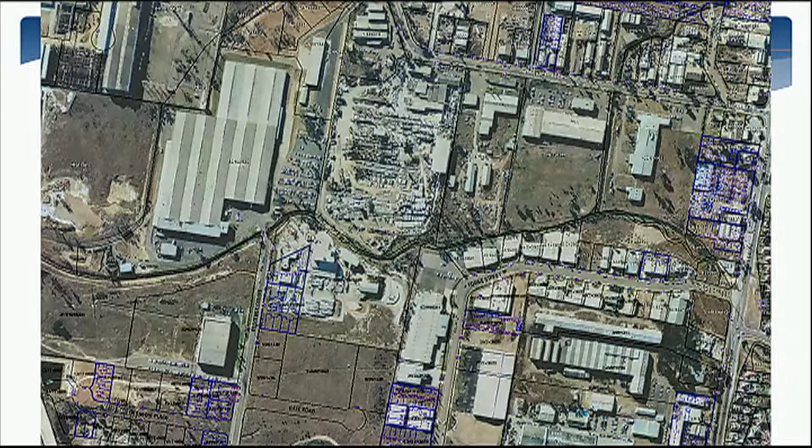So this is an aerial photo of Breakfast Creek in the 1970s. You can see it's already incised, practically no riparian vegetation, probably got a directly connected impervious area of about 20%. And really this is the beginning of the end of this creek. You look at that creek system today, 90% directly connected impervious area. It's got more riparian vegetation than it did have. The right-hand side you can see has been cleared and it's currently undergoing rehabilitation. So rehabilitation involves creating a low-flow channel, armouring that with some pretty substantial sandstone, getting rid of the weeds and planting native veg.

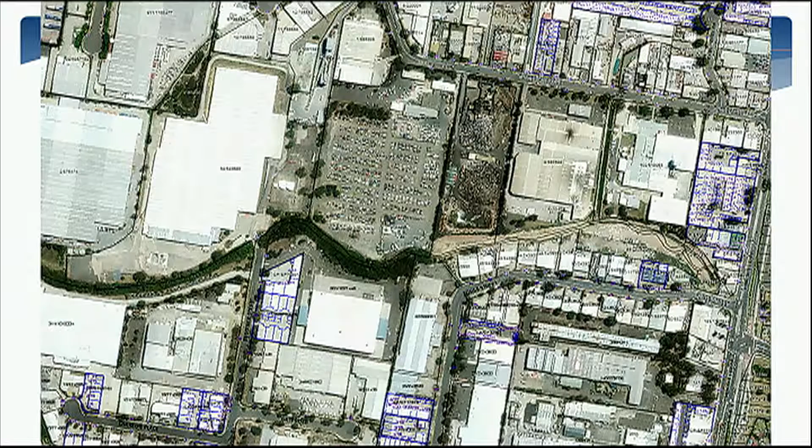At Blacktown, we protect water quality through development control plans, and the plan was called Part J. It required best practice management of all developments in infill areas. So we talk about 85% removal of TSS, 65% removal of phosphorus, 45% removal of nitrogen. So they're the water quality targets. It also required compliance with waterway stability, on-site detention, and water conservation to be addressed, where it wasn't being addressed through the New South Wales state government policy. It's quite a good example of an integrated water cycle policy.

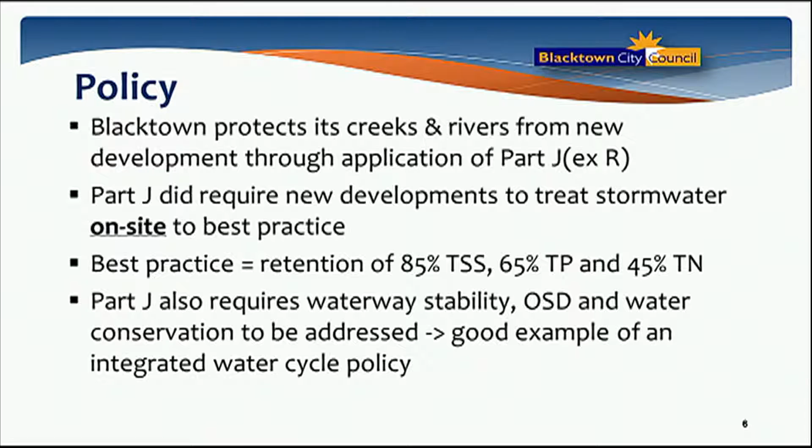So water quality is about protecting the biological and chemical quality, and to some extent the physical quality of creeks. Waterway stability is about making sure those creeks aren't eroded every time it rains. We do that through something called the Stream Erosion Index. However, the Stream Erosion Index is really a geomorphic tool, and it's not an eco-hydrological tool, and I think it misses the mark in that respect.

And in this context, we're talking about creating millions of additional square metres of paved areas. And for each million square metres of paved area we create, we add another 0.5 gigalitre of water down the creeks. That's on top of the existing flow that goes down there already. Costs a lot of money to armour all of our creeks. Obviously, it has major ecological implications.

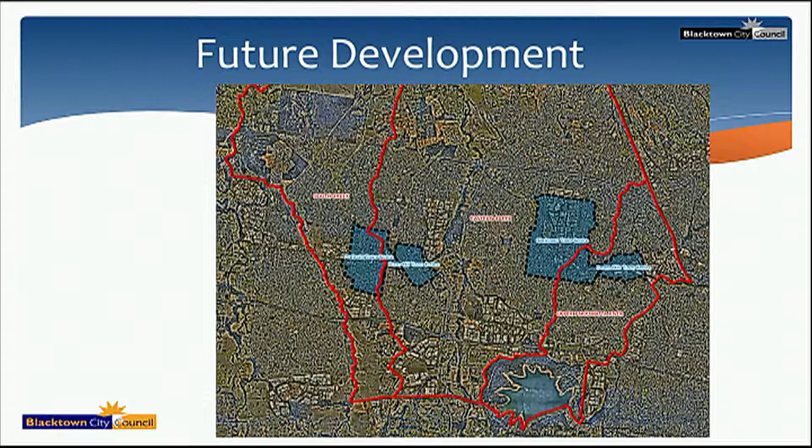So future development within the infill areas of Blacktown has been identified to occur in four urban renewal precincts. You can see on that slide. I guess it's a good thing to limit that urban renewal to those areas; that confines the impacts on the receiving waters to those receiving waters immediately downstream of those areas. We need to accommodate another 55,000 people within those precincts. So we've done some modelling of that. We're going to add another 2 million square metres of impervious area, leading to another 1.14 gigalitres of water going down those creeks every year.

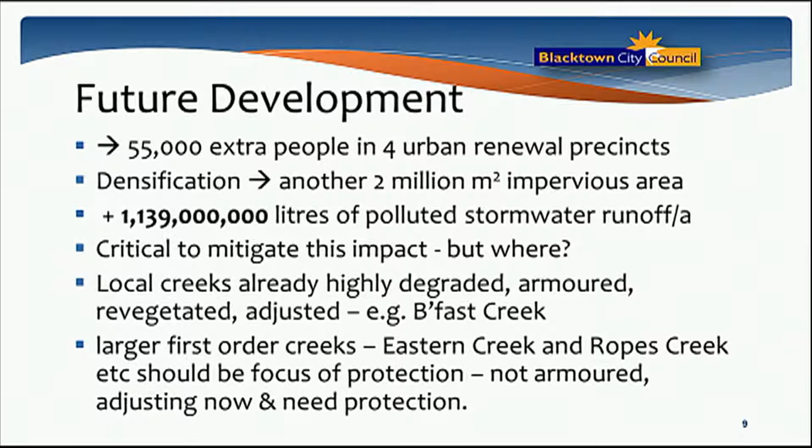Look, there's no question it's critical to mitigate that impact, but the question is, where is it critical to mitigate those impacts? And I pose that question in the context of Breakfast Creek, which is the main creek that runs through those built areas. I've mentioned they're already highly degraded, but we've got the large first order creeks, Ropes Creek, Eastern Creek, etc., which really should be the focus of our attention. They're not armoured. There's no way we could armour them. They're massive. It would be a $1 billion project to try and armour them. It would also be a massive ecological loss.

So on top of the GIS modelling, we then took that data and we dropped it into a MUSIC model to try and estimate the extra loads. And a little bit politically incorrect, but I think you can see this urban development will generate enough nutrients to keep a jihadi bomber in business for quite a long time.

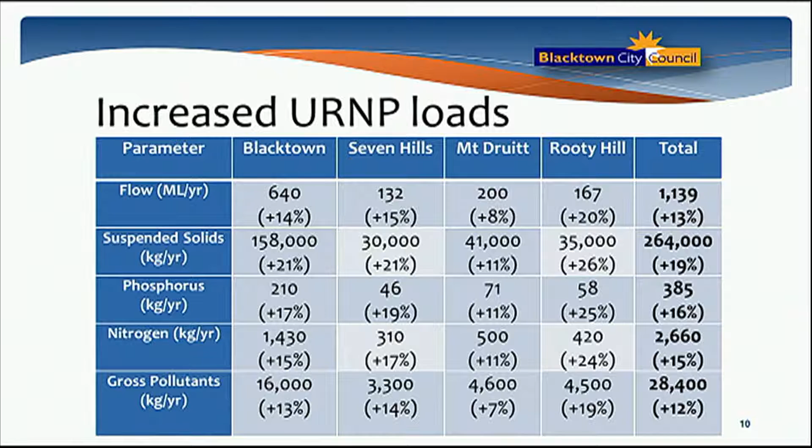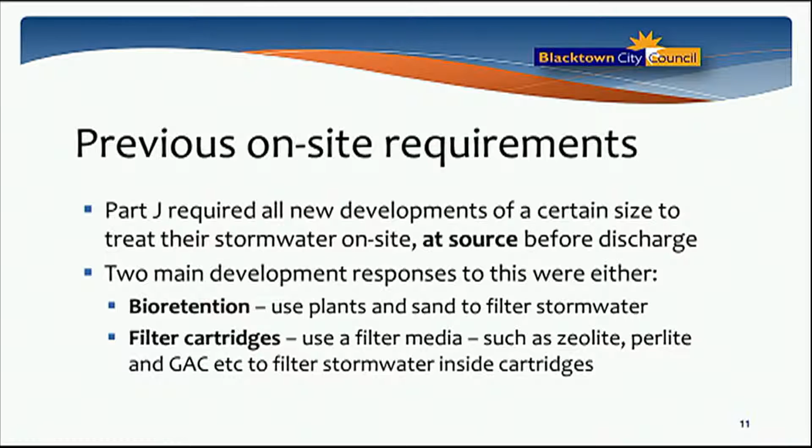And just to pick up from Andrew's, the previous speaker's indication that future development in SA is largely going to be smaller mum and dad developers. That's exactly what we've got at Blacktown. It's opportunistic. It's not done by Mirvac or Lend-Lease. It's very much shoehorned into the development. There's no way that we can capacity build all of these small developers. So, we really wanted an integrated response, but it's very clearly not integrated.

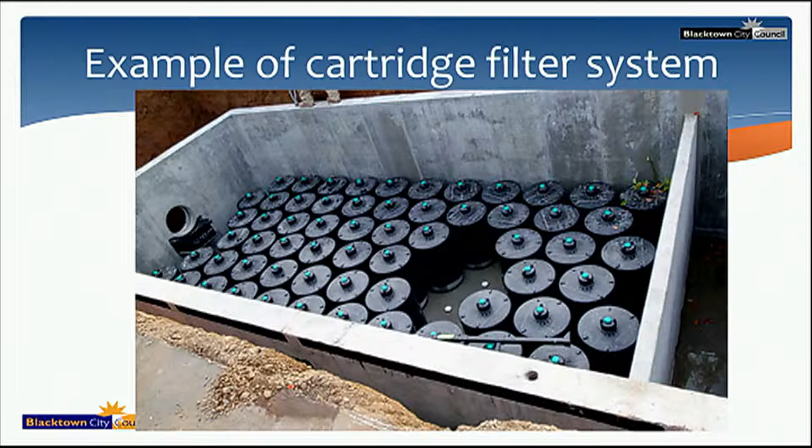That's an example of a cartridge filter system. I don't know if you guys are familiar with them. Water flows into the chamber, fills up the chamber, enters the cartridges. It's polished by perlite, zeolite, other filter media, and it flows out cleaner.

So council received a lot of complaints with respect to the on-site requirements. We had an overzealous DA assessor who was making everybody's life quite difficult. It was taking a lot of time to assess it. It was very costly. We've seen that the responses were shoehorned. But really the biggest risk is that once these systems were built, nobody was actually going to maintain them. And the evidence shows very clearly that people weren't spending money on maintaining them. So council resolved to comprehensively review its development control plan.

That's another example of a bioretention system, built in very limited open space on a townhouse development. So it actually sterilises that space. It's also quite weedy. So we engaged a panel of experts, including Tony Wong and some public policy experts and urban development industry representatives. They all endorsed council's policy.

But then also council staff recognised that there was a potential opportunity to do something off-site, and so we started looking at developing a precinct scale approach. We commissioned quite a detailed feasibility study, probably more detailed than most strategic planning I've done in the past.

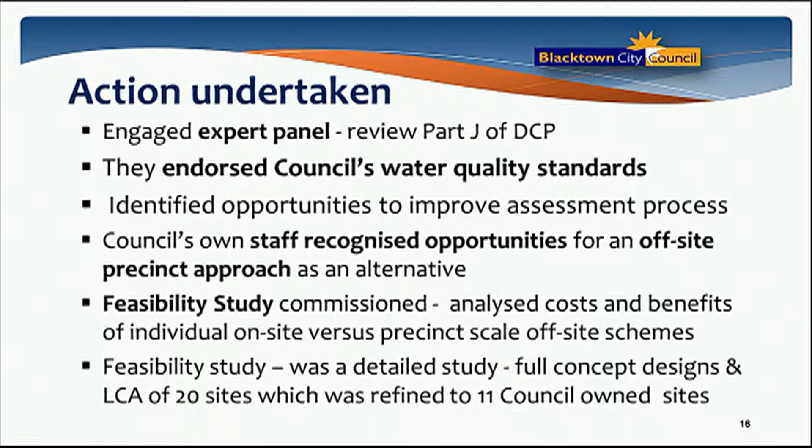And on the one hand, we knew what the load of pollution was that we needed to mitigate, and we had no idea how many treatment systems it would require to mitigate that. So we basically just went about designing 20 systems, and eventually, we went through this iterative process and we matched up the number of treatment systems with our target pollutant load reductions. In the end, we came up with 11 systems.

So just to talk about where offsets are appropriate, they're not appropriate everywhere, but in this example, you can see that you've got a sensitive reach of a river shown there in red. You've got development upstream of that. And in this context, it's really important to have your stormwater treatment upstream protecting that reach.

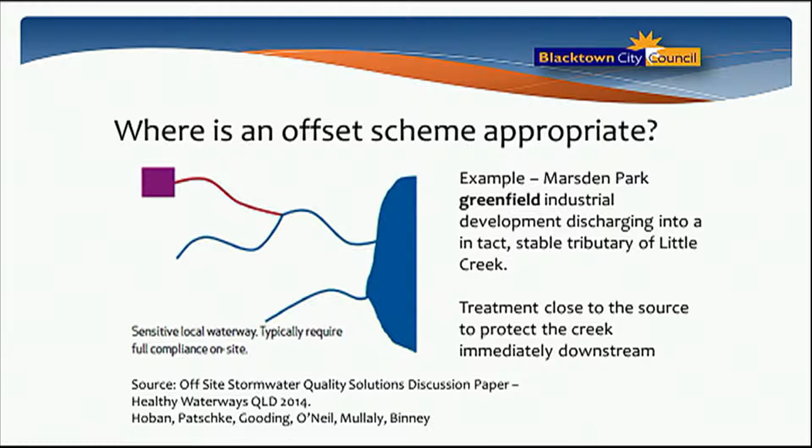This is very much the context at Blacktown, where you can actually provide the treatment anywhere along that river system, because our downstream rivers, our larger rivers, are now the target of our protection. We don't have to worry about Breakfast Creek anymore. It's gone.

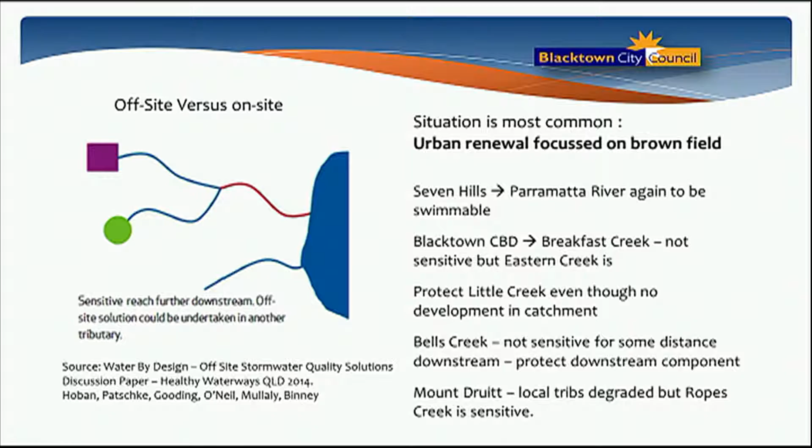So this just puts that same thing in context. The blue shaded area is the proposed urban renewal precinct. We don't have to have the treatment located here. It's quite appropriate to locate the treatment in the other three locations shown. We can achieve the same net impact on the main river there, which is Eastern Creek.

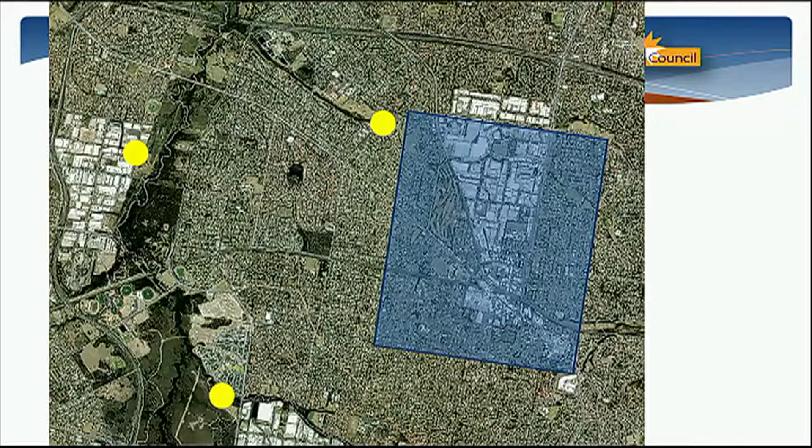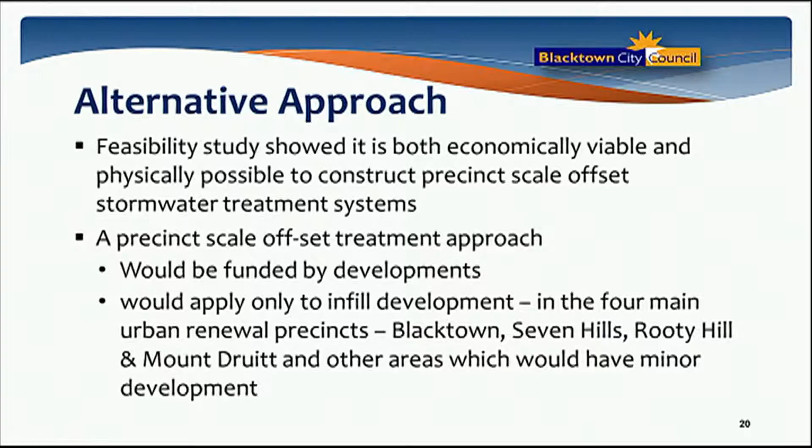So the feasibility study showed it's both economically viable and physically possible to construct precinct scale offset systems. The approach would be funded by developers through contributions, and it would apply in those 4 urban renewal precincts. There's the locations of the 11 systems that we developed. We've actually got 2 areas there, which I'll talk about a bit more in a minute.

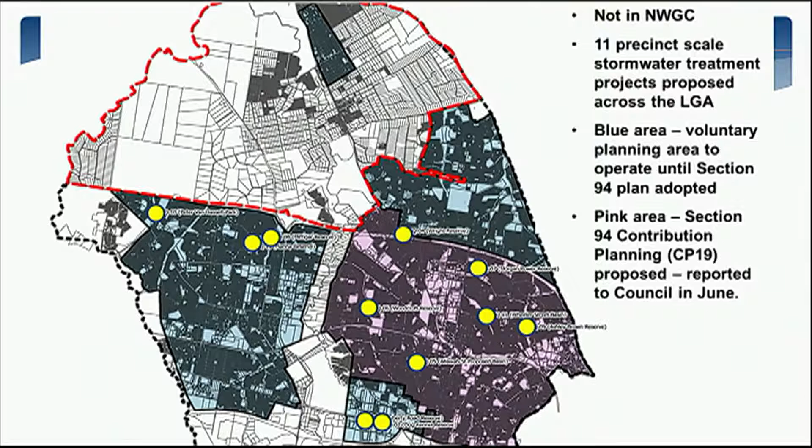So all the systems are located on council land. We had to take a really open view of this. We had to rethink the engineering involved. We weren't going to be constrained by gravity, so we've looked at using pump stations. We worked out that it's much cheaper to put in a very large pump station than it is to dig 3 million cubic metres out of the ground and dispose of that. And that includes the whole life cycle costs of those pump stations.

So the idea is to also use some of our sports fields and to turn them into large grassy bioretention systems. So where we can, we're co-locating the treatment systems on sports fields. Sounds like a daft idea, but sports fields are clay, and the minute it rains, we all get emails at council saying these sports fields are closed for the next 4 or 5 days.

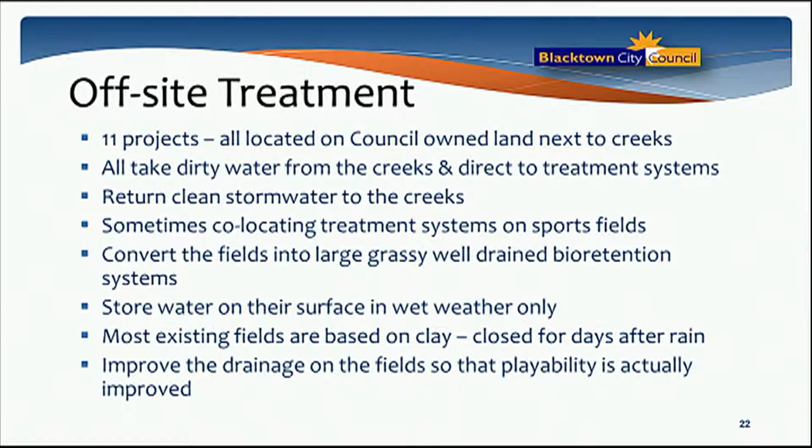So what we're doing is actually digging down, removing the clay, replacing it with a well-drained filter media, putting grass on top, and allowing water to percolate down through that sand, and then returning most of that clean water back to the creek systems.

Look, this is not a new idea. I think Baden worked on this project in a past life in New South Wales. This is a sand filter at Kiama. Project has been up and running for about 10 years and it's working really well. It harvests stormwater. It's located in a really important public open space on this pretty New South Wales coastal town.

We then took that idea and applied it to a mainstream urban development for Mirvac. So what you're looking at there is actually a grassy bioretention system. We're not sterilising any of the space. It's really nicely landscaped and it's a really great space to be in.

So just an example of one of the treatment systems. It's the largest one, in fact. It will be applied to almost an 800 hectare catchment. It's actually located in an area of the council that won't be subject to any urban renewal at all. So in effect, with a different policy, we'd never get funding to do anything in this location.

Also, the downstream receiving water is quite sensitive. And again, if we had an on-site policy, we would never be able to do anything to address water quality to protect this sensitive receiving water here. Sorry, just to go back, you can see there's a large number of sports fields there, and part of the proposal includes harvesting the water to irrigate all of these sports fields in the green area.

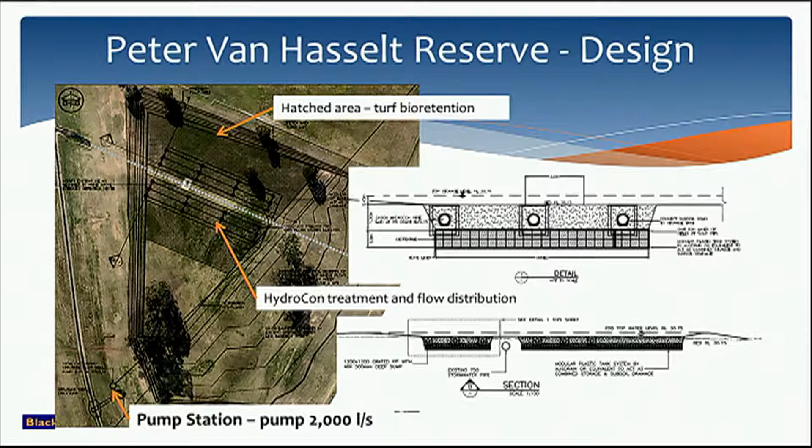In terms of costs, this system is not small. It will cost $7.4 million with a life cycle cost of $12.4 million. The capital cost in terms of nitrogen removal, though, is incredibly cheap. It's $3,300 to remove each kilogram of nitrogen, which is about half of Melbourne Water's offset.

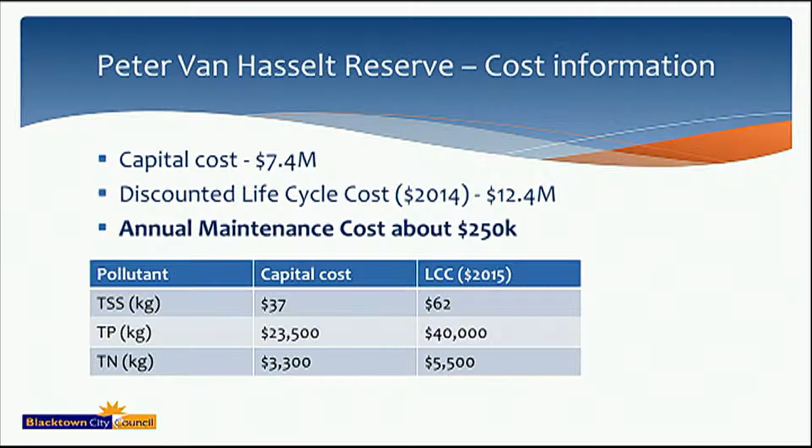The really interesting thing with this project, the volume of water that we can harvest from the system is about 113 megalitres. And the value of that water is $250,000, which pretty much equals the maintenance costs of that system. So instead of buying $250,000 worth of water from Sydney Water, we harvest the water, we pocket, and use that money to pay for maintenance of the system.

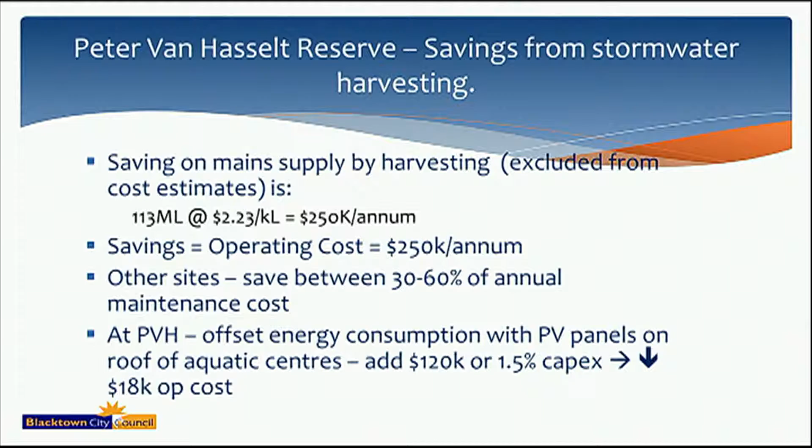In terms of the energy consumption, pumps don't actually consume that much power. It's relatively easy to offset their power consumption. So it is also kind of a greenhouse neutral system.

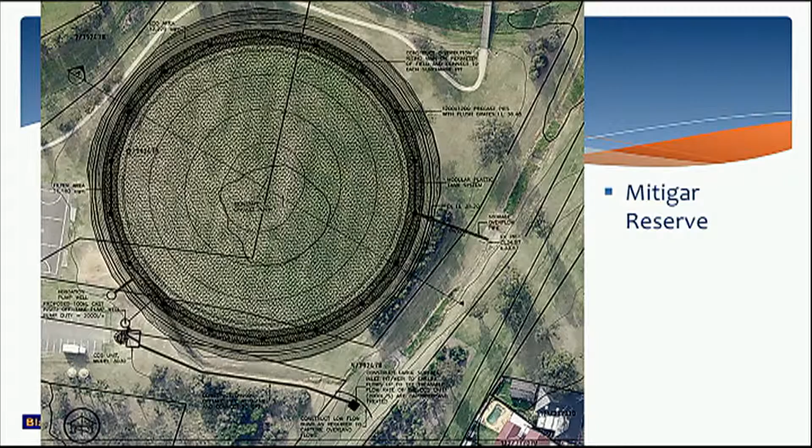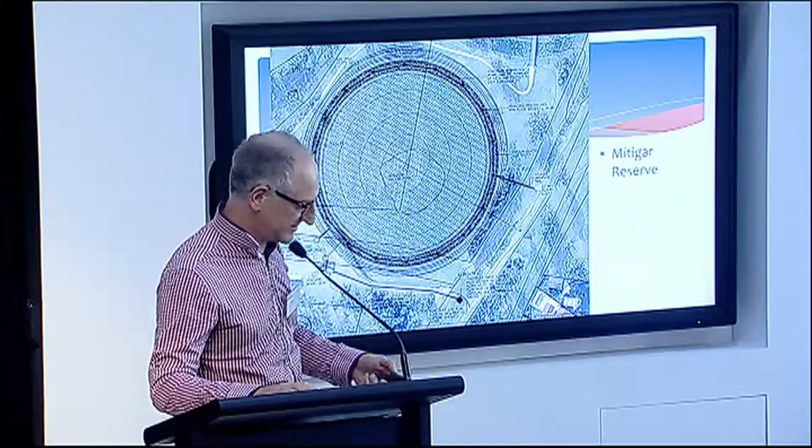That's another example, proposing a co-located treatment system on a cricket field. We'll be pumping water out of this pipe up into a CDS unit, and then distributing that water around in a ring main and allowing it to pond onto that field. Another example, just illustrating the concept further.

So I guess it's important to note that what I've just shown you, the systems address water quality. They don't address waterway stability in any way. Of the extra 1.14 gigalitres of water to go down those creeks, we can harvest only 300 megalitres. So there's another 900 megalitres that's going to go down without any management at all.

What we can do, though, is we do have an on-site detention policy, and that on-site detention policy has now been tweaked to make sure that it also achieves waterway stability outcomes. And I think John Argue had a leading role in the development of this policy. In terms of stream erosion index, adopting the new policy that John influenced, we can achieve a stream erosion index of 1.5, which is almost at our stretch target of 1.

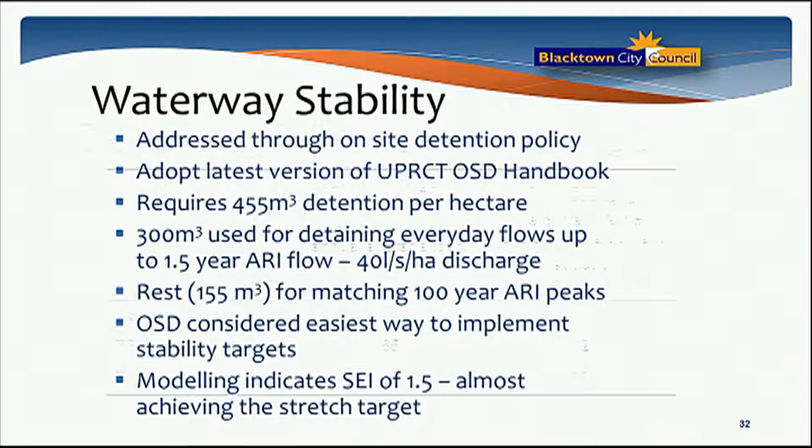So, in terms of the beneficial effect on water quality, we certainly achieve the best practice targets, or the modelling predicts we will certainly achieve the best practice targets. But in terms of those urban renewal precincts, we actually improve the water quality more than the current water quality. Sorry, I'm speaking engineer speak here.

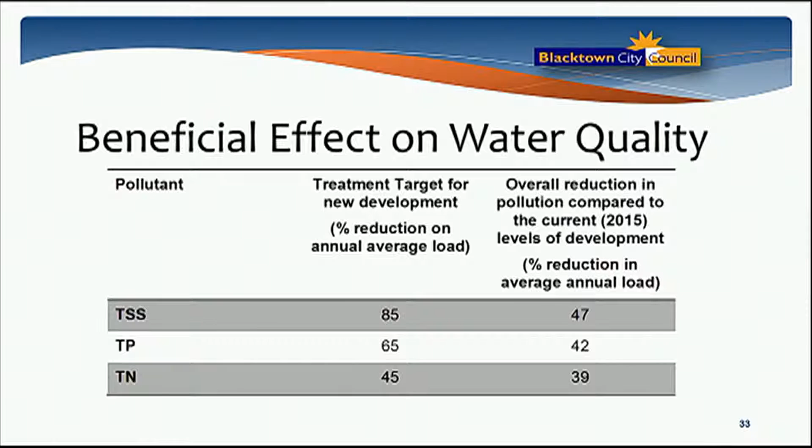We're actually reducing the pollutant loads beyond the current levels by quite a considerable amount. So, for example, if TSS was 100 tonnes today, it will be 50 tonnes after this proposal. So we're halving those loads, and we're reducing the nutrient loads by about 40% compared to current levels.

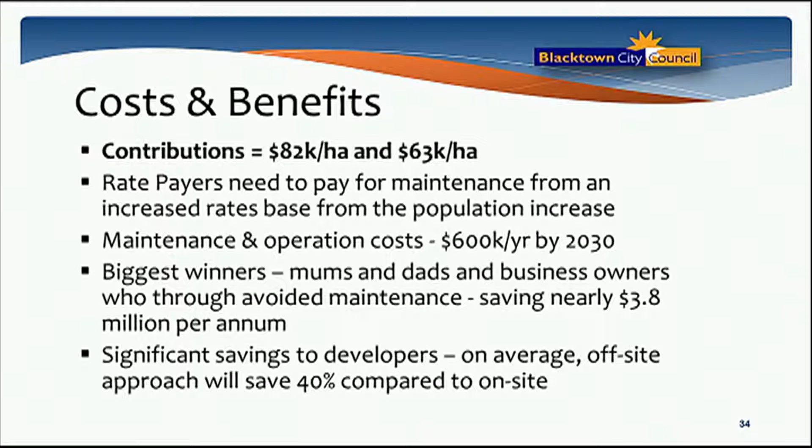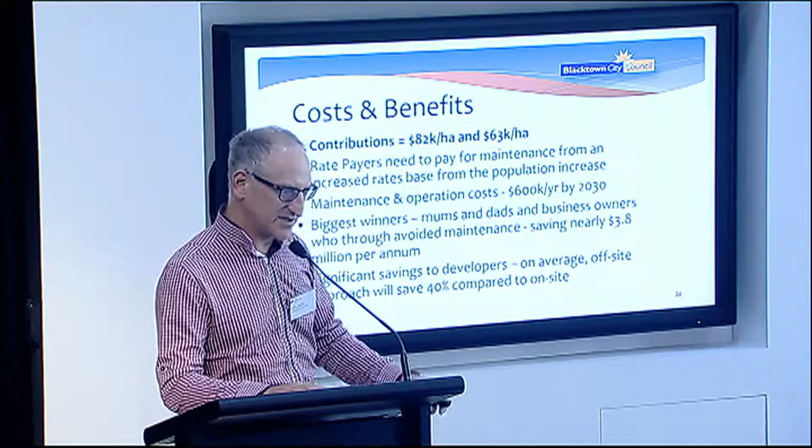In terms of costs, we're asking for contributions from developers to pay for the scheme. Those contributions are levied on a rate per hectare. Depending on where you are, they're $82,000 a hectare or $63,000 a hectare. In some way, council's a big loser because council will now have to take on the maintenance of those schemes. The cost of that will be reduced massively by the water savings, but council is also committed to funding the maintenance, and that will be $600,000 a year.

The biggest winners will be the mums and dads and the business owners who won't have to pay for on-site maintenance anymore. Not that they ever did or would have. But in pure economic terms, that will be a saving of $3.8 million a year. So there's a very clear business case to support the off-site argument here. $600,000 versus $3.8 million. And that's the ongoing life cycle cost. If you look at the capital cost, it's much cheaper for developers, so they're pretty happy about it too.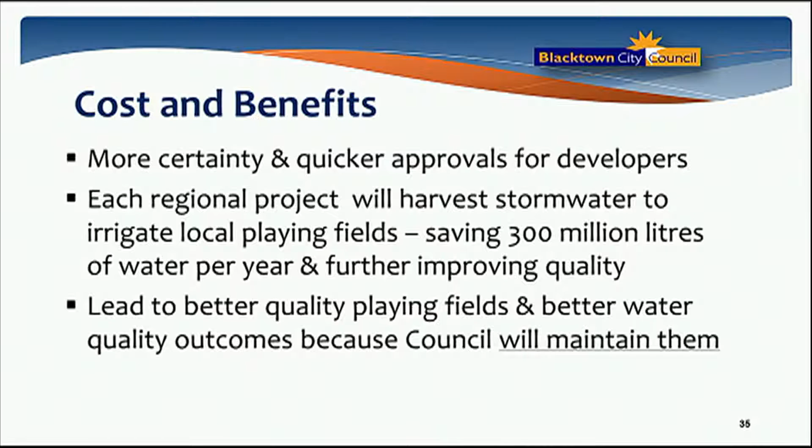It provides a lot more certainty for the developers. The developments are being approved more rapidly. And I guess I've already mentioned it's going to help council save 300 million litres of water per year. In terms of the total nitrogen costs to remove each kilogram of nitrogen, the scheme will cost $5,900, which is a bit cheaper than Melbourne Water's offset, $6,645.

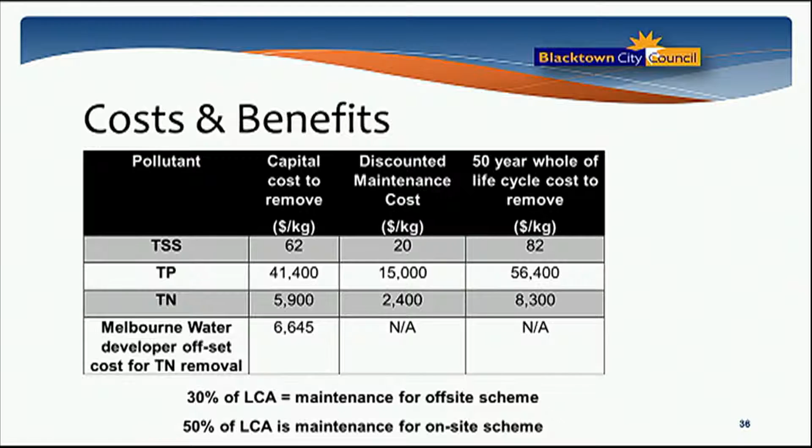So what development does it apply to? It applies to medium and high density residential development, including attached housing and any subdivisions. It applies to most business and industrial development greater than 150 square metres, which is most business and industrial development. Single dwellings, dual occs, group homes, boarding houses, childcare centres are exempt.

There was a lot of politics around this. It got very politically hot, and we figured sometimes it was easier to just agree to the councillors' requests. For example, dual occs, we realised we would be giving up something like $100,000 in contributions by exempting them, and it wasn't a problem. All of those 11 projects are valued at $56 million. So giving up $100,000 wasn't a problem.

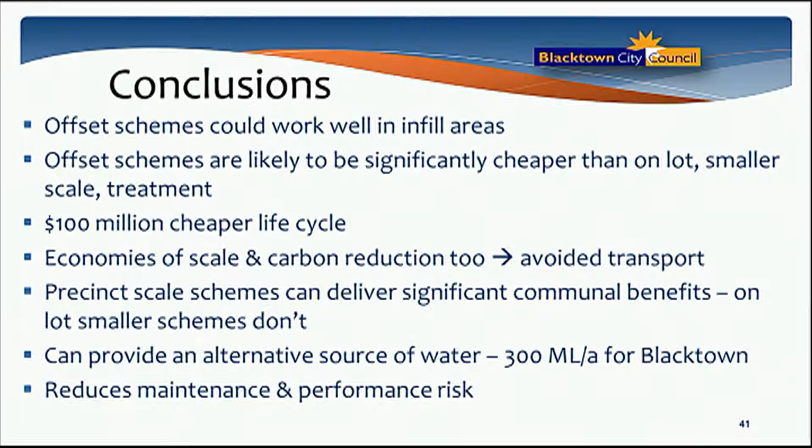Think about thousands of vehicle movements associated with maintaining or not maintaining small stormwater treatment systems across many distributed sites, versus several vehicle movements to maintain 11 systems. A big bonus with this is the value in the water that we're going to harvest, which will offset or nearly offset the cost of maintenance of the schemes.